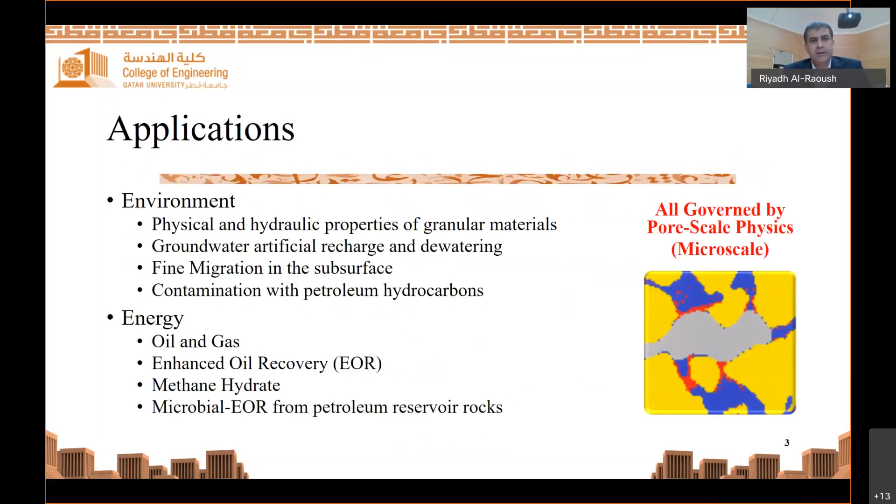So why microscale? Many environmental processes and phenomena take place at the microscale level or the pore scale level. Therefore, to better understand these at the larger scale or the macro scale, these processes or phenomena must be investigated at the pore scale.

This figure here shows an illustration of how contaminants transport through porous media from an underground tank towards a fresh groundwater aquifer. As you can see here, mass transport mechanisms of contaminants take place at the microscale level or the pore scale level. Therefore, there is a need to obtain non-destructive 3D images at the resolution of microns to observe and investigate microscale processes for different applications.

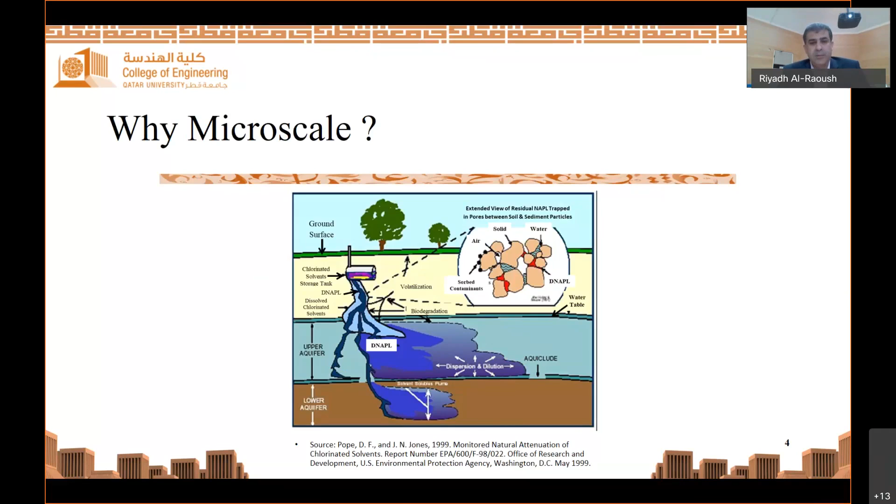So the overall experimental approach that we adopted here is we design and conduct microscale experiments based on the application of interest. We obtain non-destructive 3-dimensional high-resolution images of systems at different experimental conditions, and we develop and implement robust and efficient algorithms for image processing and quantification of the relevant pore scale processes from the large 3D images.

So why synchrotron microcomputed tomography for our applications? Synchrotron microcomputed tomography is an imaging technique that provides non-destructive imaging, 3-dimensional high-resolution images on the order of microns, and most importantly, energy is tunable to obtain better contrasts between the different phases that we have in the images.

This image here is part of our experiment that was conducted at the Advanced Photon Source at Argonne National Lab in the United States. What you see here is the image of the 7 giga electron volt storage ring. And these pictures here show some of the experimental setups that we developed and used for 3-dimensional images for different applications. And I will talk about these shortly.

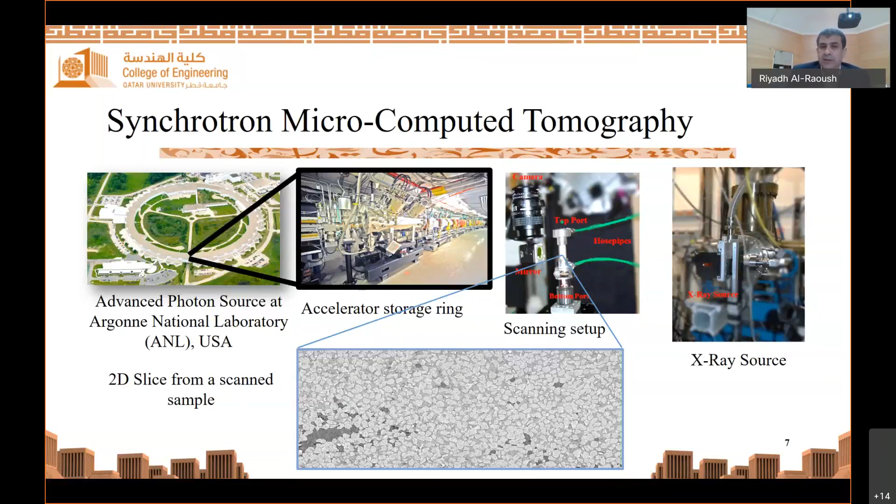While all the images obtained from tomography are 3D, this image here shows a 2-dimensional cross-section. It just shows different phases inside the column. This slide here shows the experimental setup that we use to conduct multi-phase flow experiments.

In these experiments, CO2 was injected into saturated porous media and was imaged at different CO2 saturations. Monochromatic X-ray radiation was used to scan the specimen, and the injection of CO2 took place on the moving stage. As you can see here, the setup was equipped with top and bottom ports, which were linked to tubes that allowed fluid flow. The bottom port provided gas, while the top port was used to drain water in order to allow gas to invade the pore space. Vertical springs here were added to apply stress to the porous media.

Image C here shows a 3-dimensional image of the interior of the object, where CO2 is shown in blue and the sand is shown in gray. Here, to enhance the contrast of the phases of the image, we doped the water by adding 2% of potassium iodide. Then the sample was scanned at 2 different energies, below and above the iodine edge.

You can see here the image size is about 2000 by 2000 by 1000 voxels, and it took about 15 minutes per scan to complete the experiment. And the resolution of the image that you see here is about 3.6 micron per voxel.

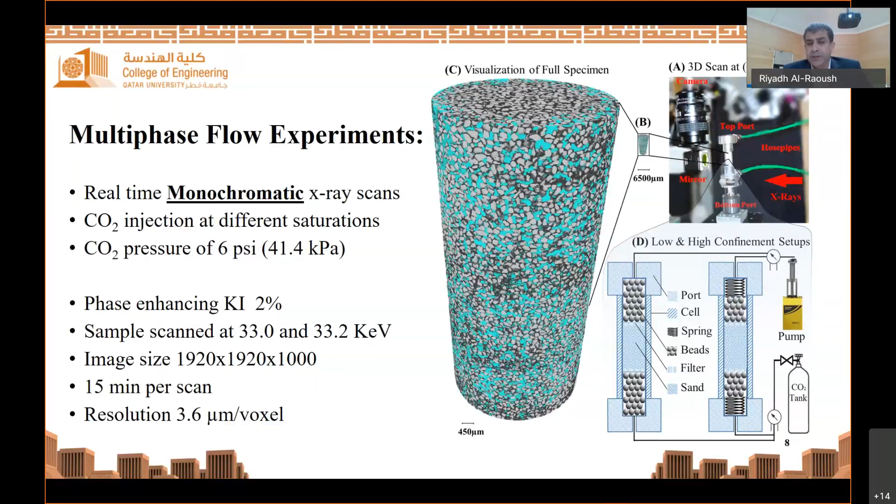This is the experimental setup that we used for hydrate formation and dissociation experiments. The setup was designed to control the pressure and temperature to simulate the formation and release of hydrate from deep reservoirs. Pink beam synchrotron tomography was used to obtain non-destructive 3D images. Pink beam uses a grazing incidence mirror and an X-ray absorbing foil instead of the monochromator to eliminate high and low energy photons, which gives a high flux of X-ray 3 orders of magnitude higher than the monochromatic beam.

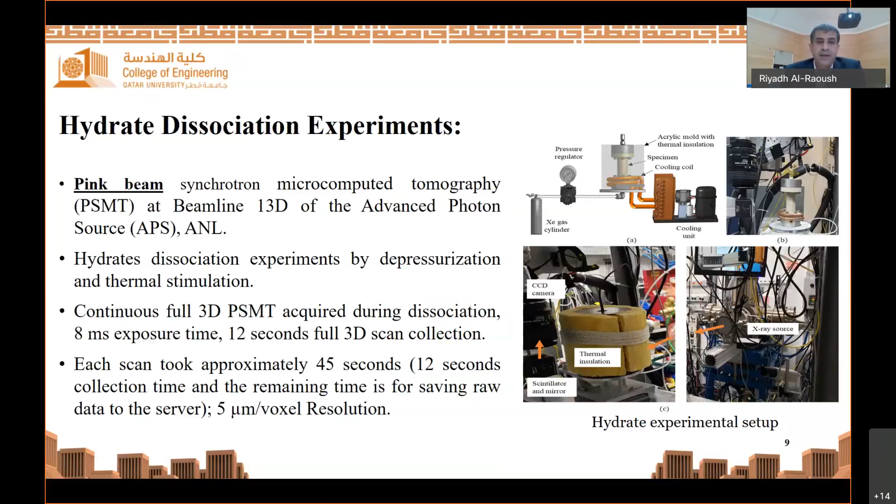This was necessary for our work because the X-ray needs to penetrate the thermal insulation that we have in our sample and the high pressure cell that we used for this setup. The total scanning time for this experiment was about 12 seconds, and the experiments were run for more than 4 hours for hydrate formation and another 4 hours for hydrate dissociation.

This is another series of experiments that we conducted related to multi-phase flow in porous media. The objective of these experiments was to investigate patterns of fluid entrapment and their correlation with the physical and chemical characteristics of the porous media. Here, the setup shows the experiment. The inside diameter of the column, or the cell that we use, was about 6 millimeters, and the height of the column was about 8.5 centimeters.

The column was connected to tubes and pumps that allow fluid injection into the cell, and different sands were used to represent natural porous media systems. We used different fluids, including soltrol and water, to represent immiscible fluids in the experiments, and to investigate the impact of wettability on the entrapment patterns of the fluids. Fractionally wet systems were obtained by combining various mass fractions of untreated and treated sands. The experimental cell was packed with porous media at different initial conditions.

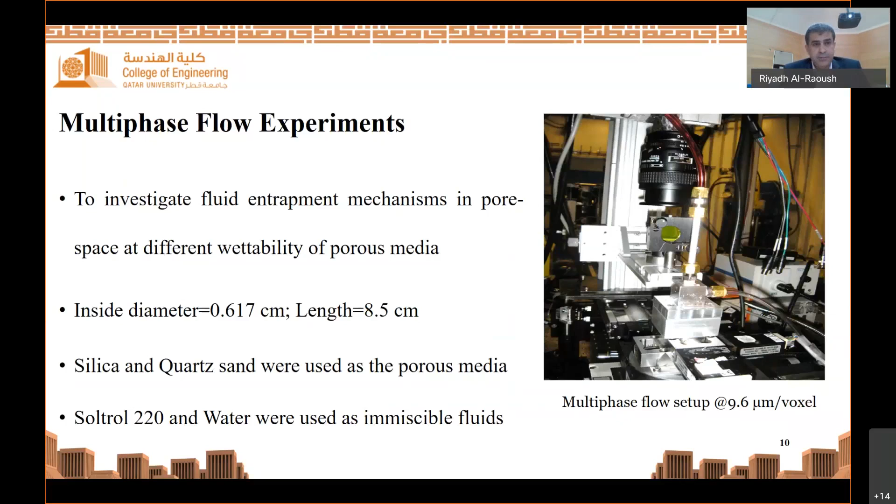Once we have 3-dimensional images obtained from computed tomography, image post-processing and segmentation are needed to convert grayscale images to binary images, so we can work with them and do some quantification. There are many segmentation algorithms available that can be used to achieve the segmentation step. Also, there are different filters that can be used to enhance the quality of the images. For instance, in this case, we use anisotropic diffusion and median filters to enhance edges and boundaries of the phases before the segmentation step.

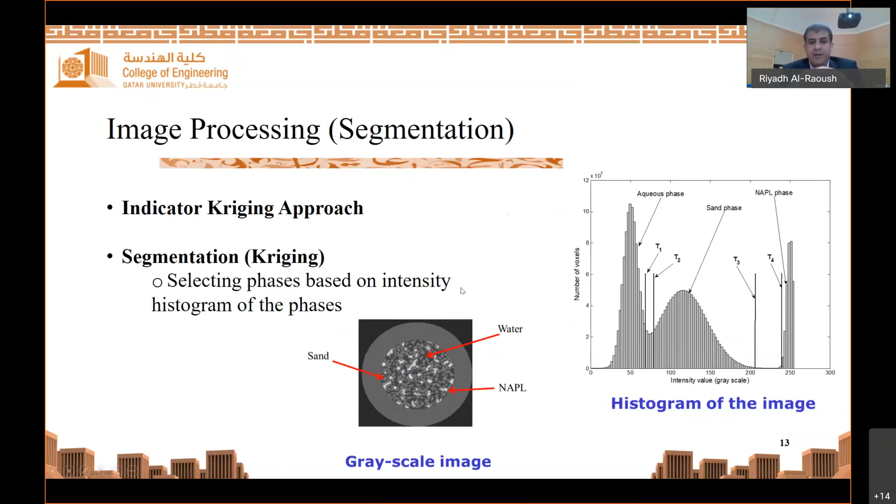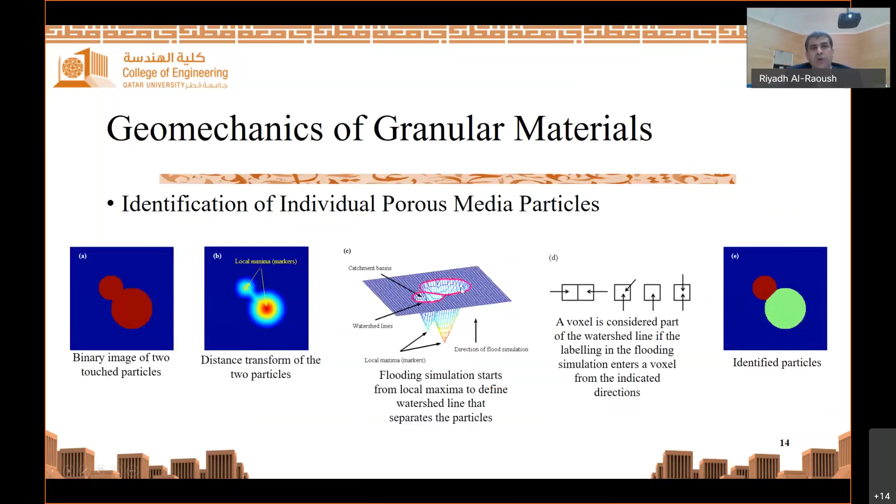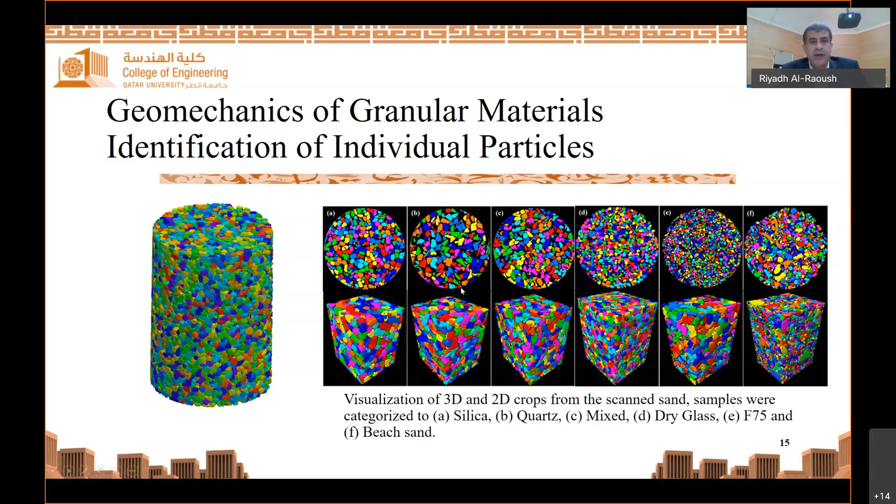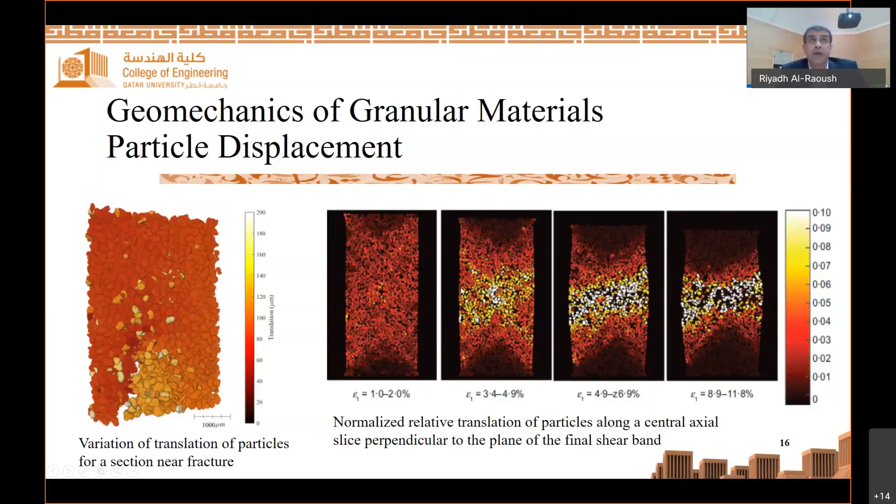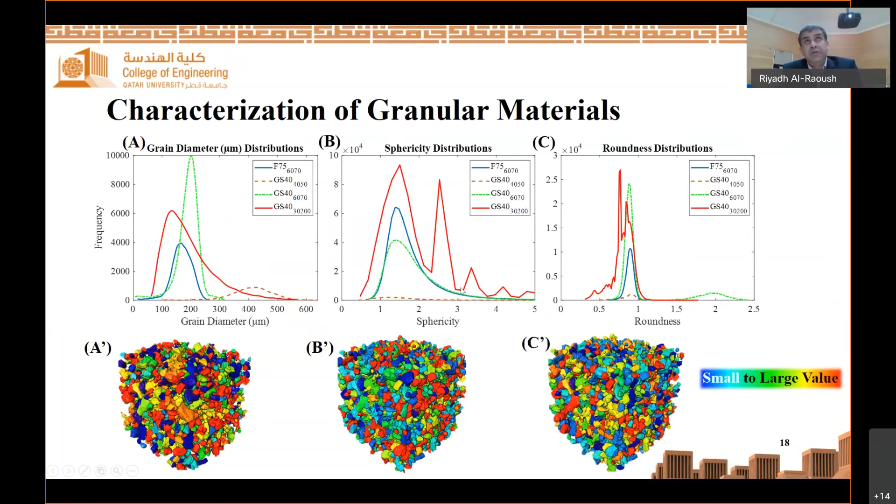These are some of the measurements that we can obtain from three-dimensional imaging in a non-destructive way. This is extremely important for our applications. So for example, figure A here shows the distribution of grain diameters in a sediment sample. And figures B and C show the distribution of important shape indices, namely the sphericity index and the roundness index. And you can see here, these are the three-dimensional images of these distributions. And everything here is done non-destructively, which is a critical factor in our research.

You can see here, let's see if I can see my pointer.

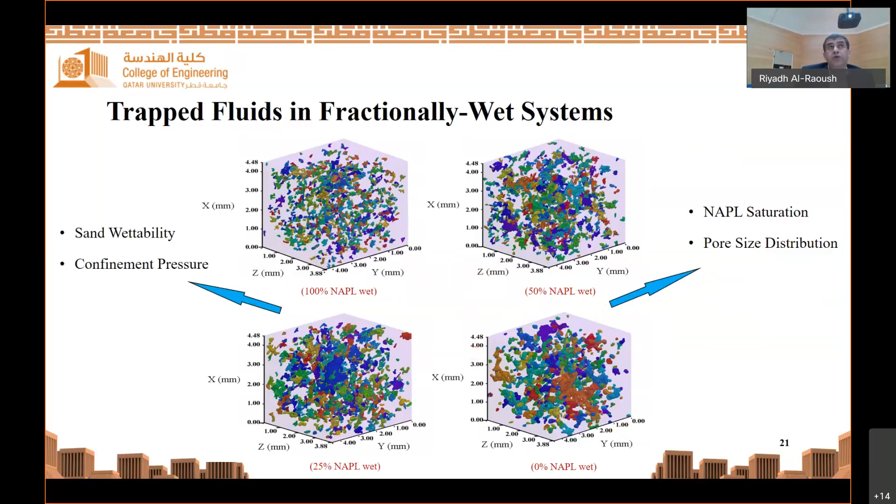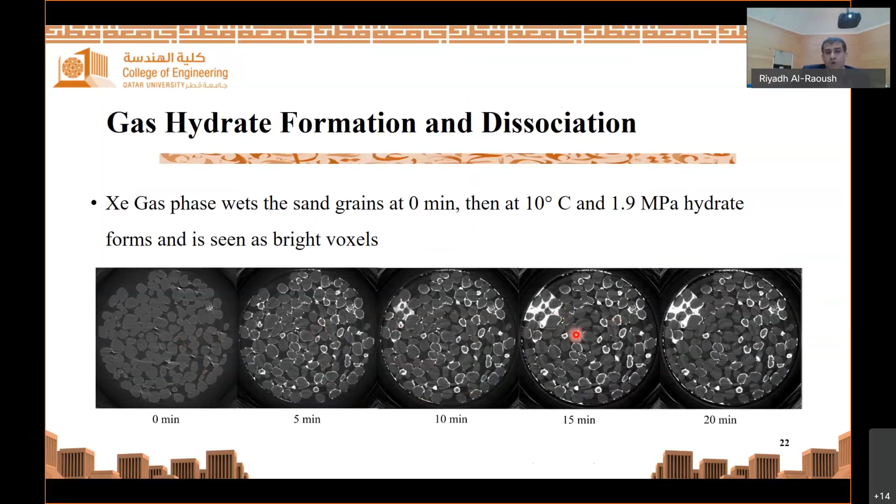This is another experiment where we used computed tomography. We looked at the dynamics of hydrate formation and dissociation in porous media. Xenon gas was injected into a fully saturated sediment at a temperature of 10 degrees centigrade and a pressure of 1.9 megapascal. These are cross sections from 3D images where the inside diameter, again here, is 1 centimeter. These images show how we can capture the development of hydrate as a function of time. You can see that this gray scale here is the porous media or the sand phase, and the white here is the hydrate formation as a function of time.

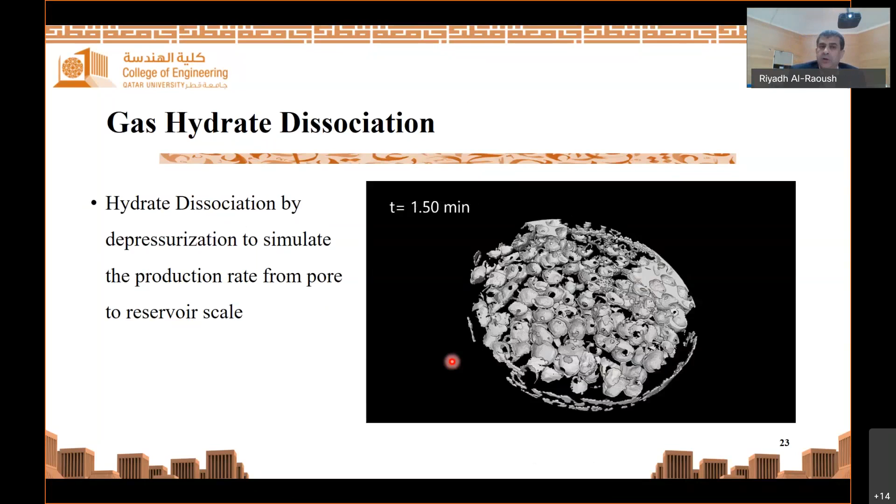This video here shows a sequence of raw tomography images captured continuously at a time step of 45 seconds. This shows the hydrate dissociation at the pore scale and how parameters such as volume and interfacial area develop as a function of time and saturation. Understanding and quantifying these parameters at the pore scale is a key factor to develop reservoir scale or macro scale models for natural gas production from methane hydrate.

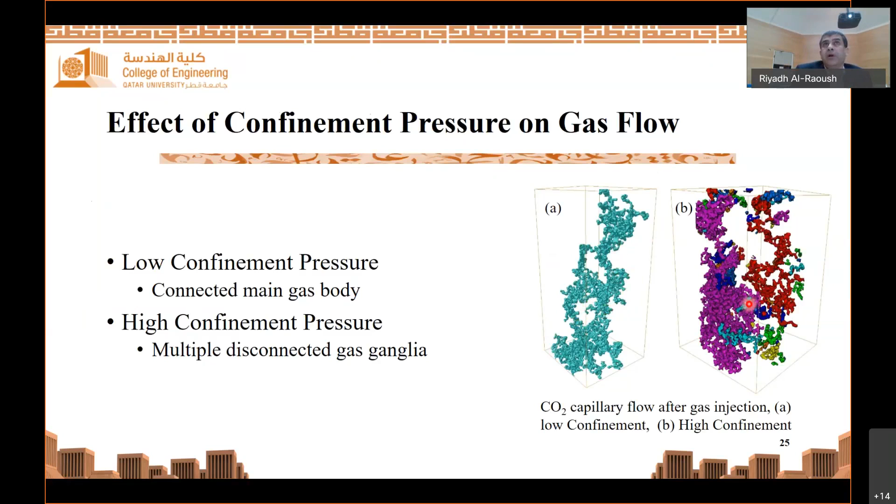This is another study where we use synchrotron microtomography to investigate the impact of pressure on the gas conductivity in sandy sediments. So for the same topology and geometry of the porous media, you can see that here we can quantify two types of flow regimes. At low pressure here, you can see that the gas phase is highly connected. However, at this high pressure here, you can see that the gas phase gets disconnected to individual or multiple gas blobs.

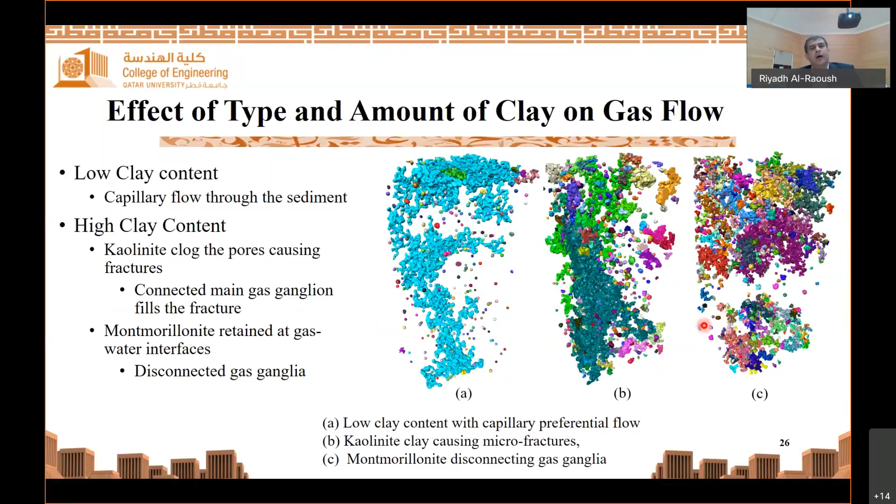This is a zoom for the type of behavior that we see if we inject clay in our system. You can see that gives us information about the clogging behavior. You can see on this image here, the clusters of clay or kaolinite are observed to be attached on the sand-water interface. So we can identify what type of interface we have here. And actually this causes clogging of small throats, which in turn gives gas-induced microfracture.

However, on this image here, montmorillonite is observed to be attached at the gas-water interface, and that causes a disconnected gas phase.

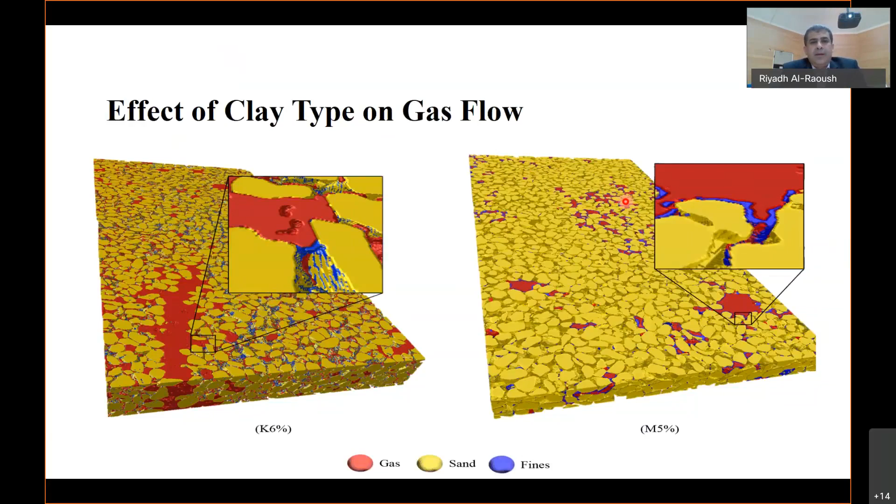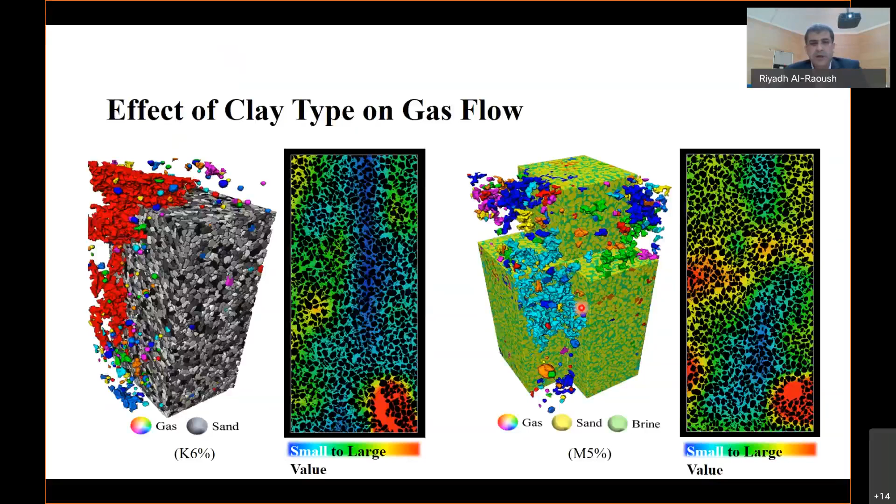This image here shows the impact of the type of clay on the flow of gas in a porous media system. We can see here in this image, kaolinite causes gas to flow as a continuous phase, this red one here. However, in this case here, you can see that another type of clay, which is montmorillonite, causes gas to flow as a disconnected phase, which in turn increases the number of trapped residual gas phases in the system. You can see that here, every color represents a different gas phase.

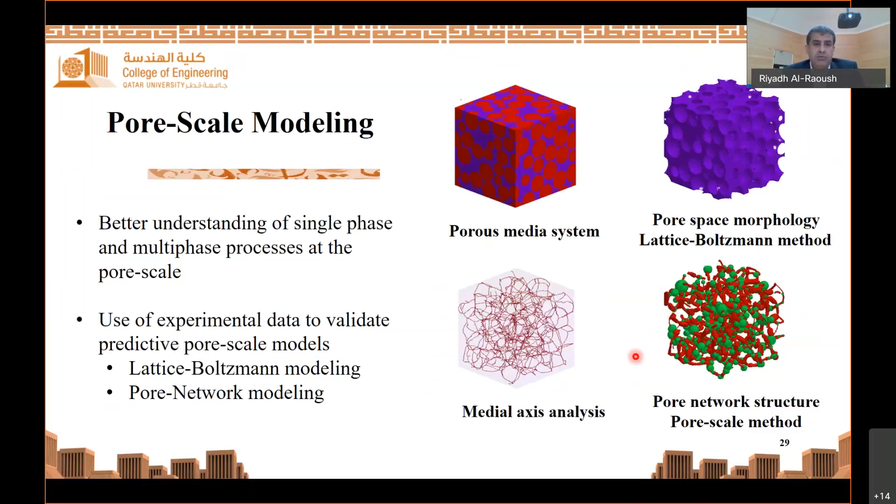Here you see the simplification of the complex pore geometry to the pore network structure, which is the base for pore network modeling. This pore network structure is used for pore network modeling based on the physics of the relevant problem of interest. This is a simplification of the void space, in other words, the pore bodies connected to pore throats. There are many algorithms available to obtain the distribution of pore bodies and pore throats. In this image here, these are the pore bodies and these cylinders are the pore throats. So we can follow the physics of the fluid dynamics in a sample like this one, so we can build predictive models.

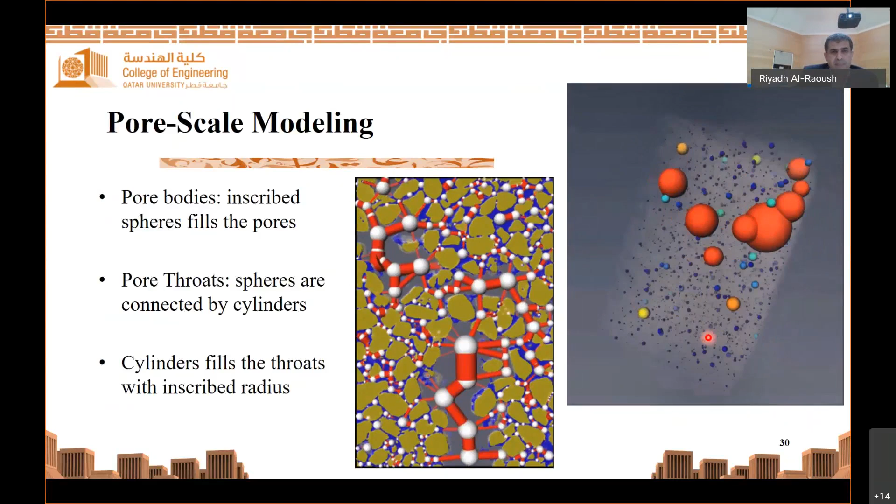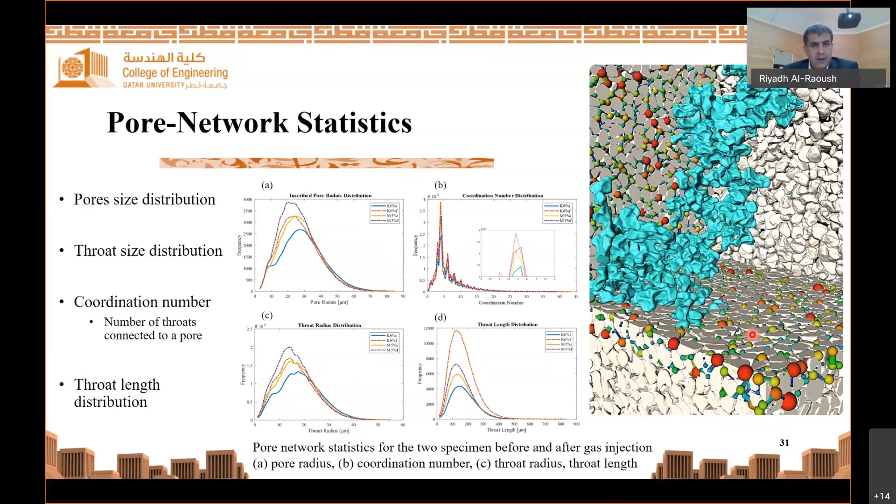Is it this way? This way?

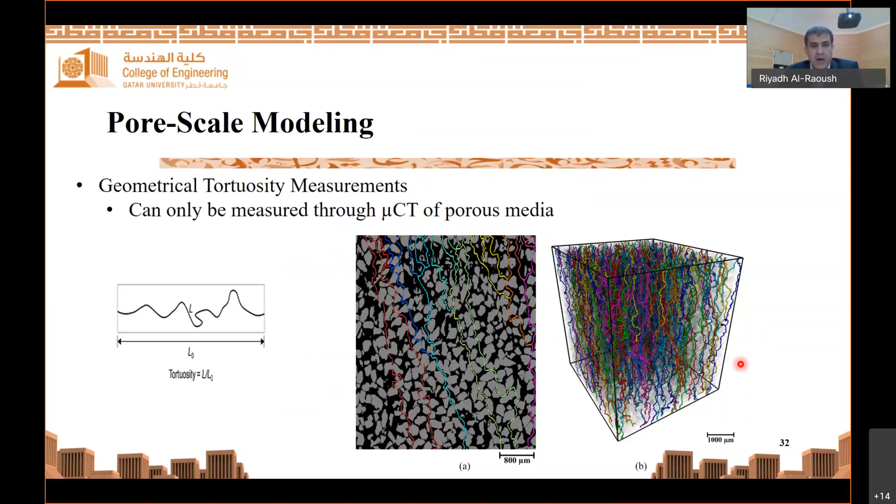The REV is the smallest volume of a given sample where the property of interest is constant regardless of the spatial location or the size of the sample. In other words, it is the minimum size needed for a sample to be representative in terms of a given parameter. So using non-destructive three-dimensional images obtained from computed tomography, we can determine the REV of a given sample.

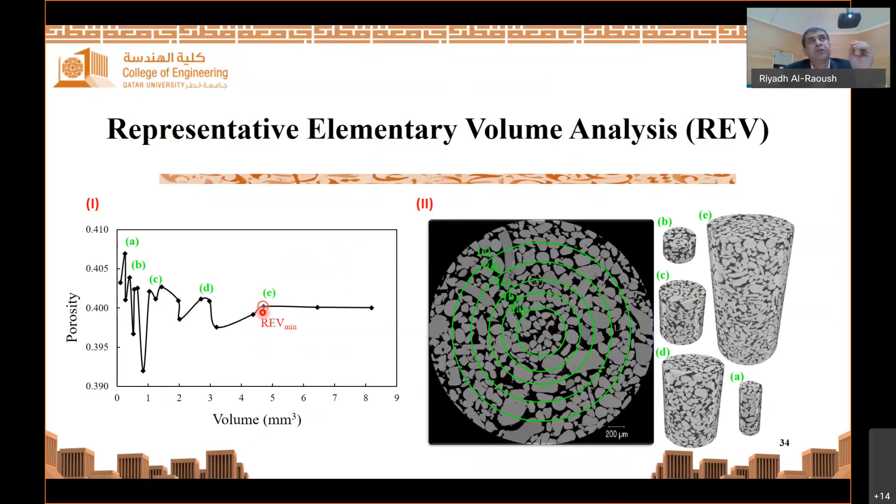Here I show the REV determination. Basically we look at expanding volumes, and we look at the parameter of interest. In this case, it's porosity. So whenever the property of interest is constant, we consider this the REV minimum, which is the minimum representative volume for upscaling. Here I show the representative elementary volume for different soil samples. And as I mentioned, determining the REV is a link between the pore scale and the macro scale simulations for any geo-environmental applications.